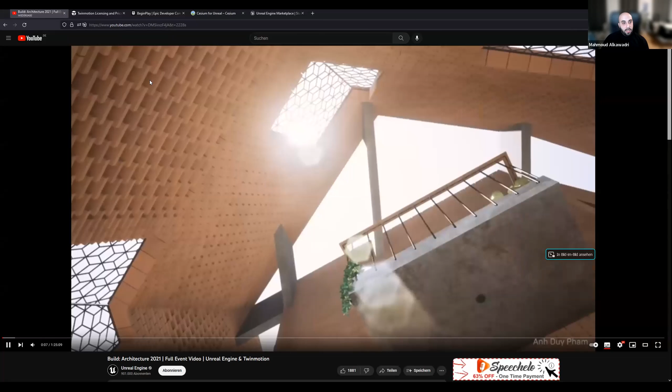I'm going to show a small demo from a big event from Unreal Engine called Build Architecture. This is just a 2-minute demo. I'm going to make it optimized for video clip—should be done now.

As you can see, Unreal Engine, or real-time, is much more than just images and videos. It can be more for applications, interactive apps, more shareable collaboration apps between different parties.

Unreal and Epic Games provide 3 main tools related to ArchViz. The first and most popular tool, according to the CG Architect survey last year, was Unreal Engine. Then comes Twinmotion, and now with the collaboration with Capturing Reality—or as the software is named, Reality Capture—you have the best invention in terms of photogrammetry.

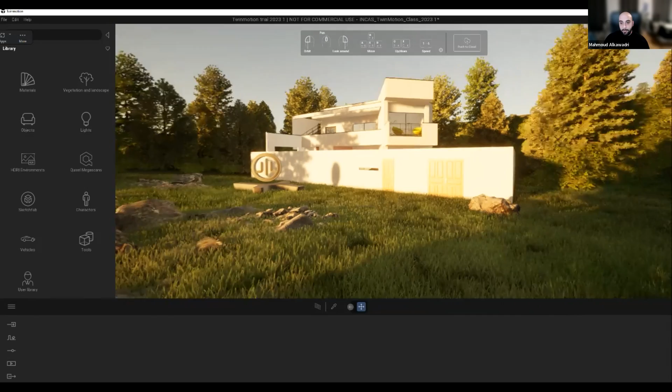Twinmotion - I will show you how it works by itself. This is a scene we will compose. What you need to do, in simpler and more accurate terms, is implement your own models. This is done through direct link or through the Datasmith exporter plugin.

You can import many objects inside of it. Once your object is ready, once it's already prepared inside your DCC software or inside your BIM or CAD software, all you need to do is beautify and compose your own scene.

The beauty of Twinmotion is that it provides you with a large library of pre-made materials and elements. This doesn't exist inside Unreal Engine.

You need to go through the marketplace and prepare them, or prepare them as a template that you're going to use each time. So here you have a large panel of your own objects.

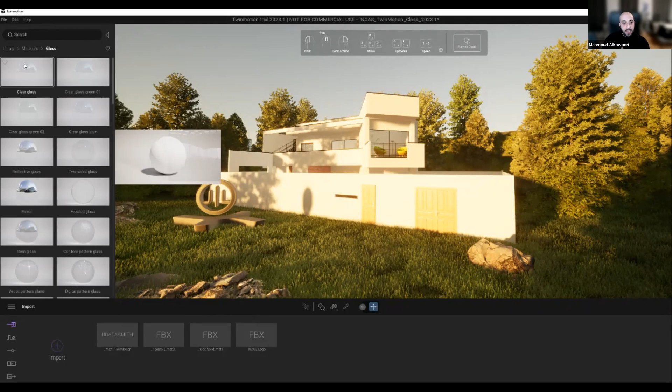You can see here you have pre-made materials, and all the materials have been categorized according to building family types, I would say, from glass and metal to stone.

You'll have multiple objects, and those objects are all high quality objects made to be used inside Twinmotion, and also made to work once you export them into Unreal Engine.

This is the interior library. So you don't need to go through the hassle of going through the marketplace.

Besides the materials, besides the pre-made objects, you also have the possibility to use the Quixel Megascan libraries. The same Quixel Megascan that you see inside Unreal Engine through the bridge is already implemented inside your Twinmotion.

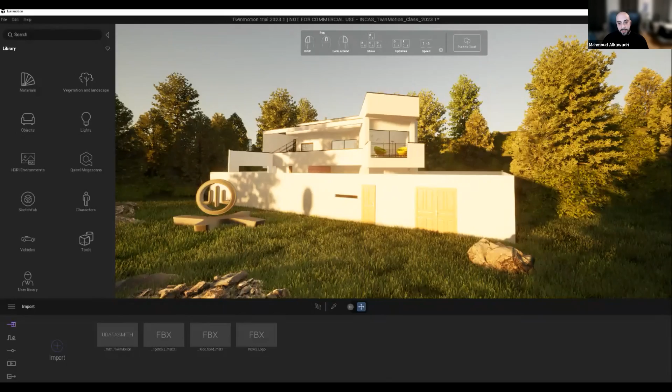The way it basically works with these libraries is, once you have your own scene, all you need to do is choose your element, and from there drag and drop it.

Drag and drop happens in two ways. It happens through whole families, because when you import your own scene from BIM software, it categorizes items according to family types.

Family types mean walls, floors, ceilings, glasses, everything. Or you can go through them and implement them object by object.

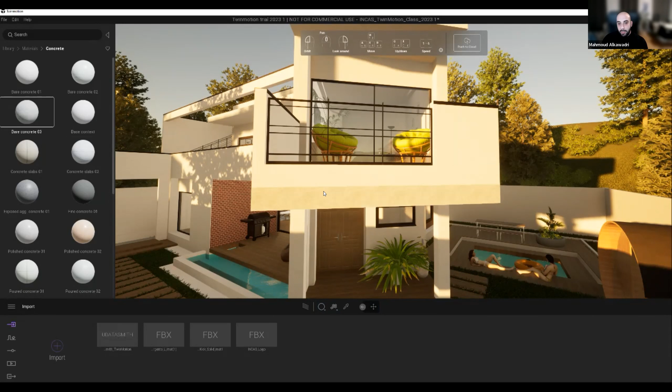And from here, you can decide how you want to do it - do I want to replace the material, or apply it just for an individual object? Once you decide, just drag it and drop it, that's it. The second part of implementing any kind of element is the same process.

You need to find your own object, find what's fit for you. I'll choose, like a chair, just drag and drop. This is an easy way to populate and dress your own scene.

The reason why people are using Twinmotion is not just for flexibility, but for rapid decision making. If I'm working as a designer and want an accurate or fast decision of whether my design will fit my need, Twinmotion is an easier way to do it. It's drag and drop, and contains large libraries of elements.

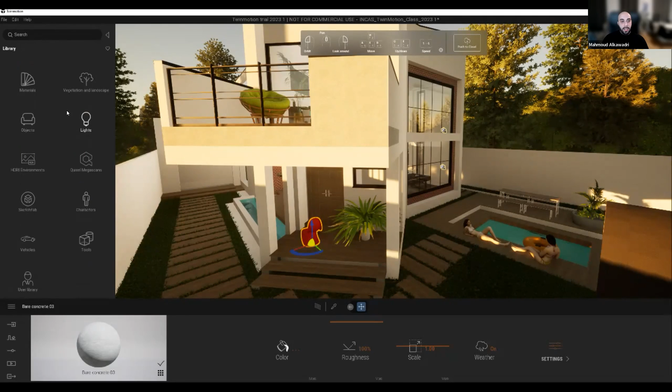Now the second part people are mostly interested in is lighting. Twinmotion provides 3 types of lighting, the similar way as in Unreal Engine: we have the dynamic sky lighting or the environment light mix. We have it here but in a smaller way.

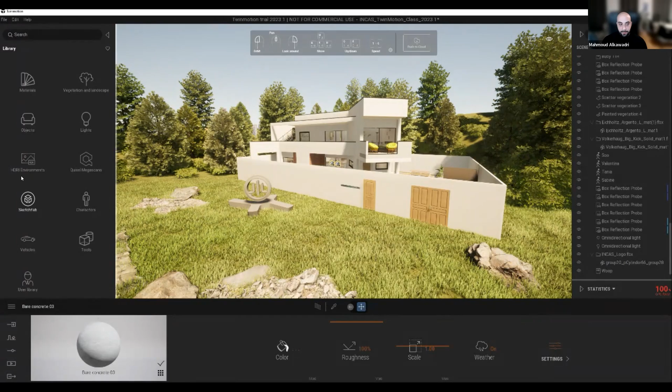They already implemented these inside Twinmotion. What you need to do is switch your lighting system. Instead of using dynamic light, go for skylight HDRI, choose the HDRI that fits your needs, download it and drag and drop it, and it will update accordingly.

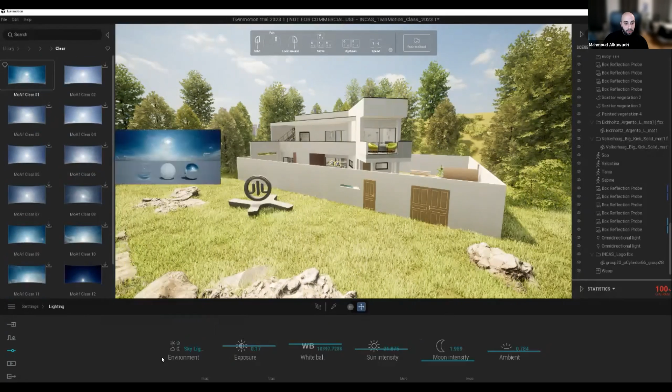Just go here, go to more, you'll see your drag and drops, drag it and drop it.

Now lots of people have been questioning whether the quality of Twinmotion is less than the quality of Unreal Engine, which is correct. In terms of reflections and shadowing, you can see there is a difference between them.

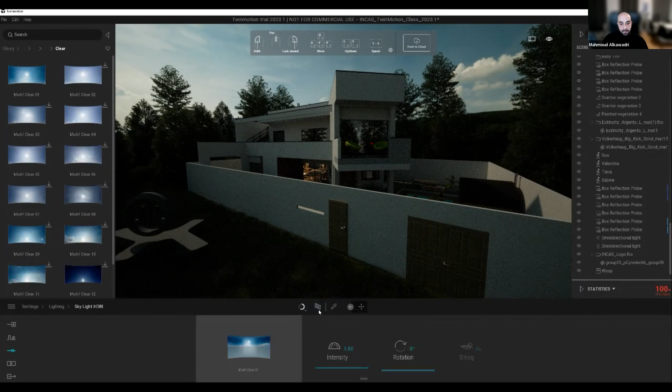But once you implement path tracing, just by clicking here, you will have a more accurate representation of what you have. Now I'm using an incorrect sky, but if I go back again to my dynamic light, you can see how it was like this. And now if I pause it, I will have a correct shadowing, a correct reflection, and a correct light and material representation.

Now in terms of timing, path tracing is relatively fast compared to Corona GPU or V-Ray GPU or any kind of offline rendering. So it's not a downside of using path tracing.

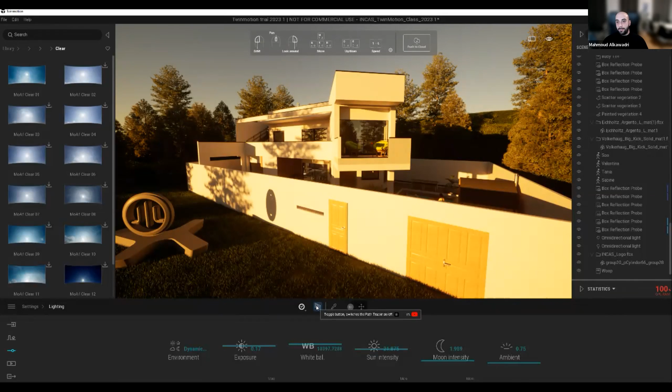As I said, there are two types of ArchViz normally: ArchViz pictures used mostly for commercial use or for selling your own product, those need to be high quality, accurate representation. And ArchViz used to take a decision inside the design process, this doesn't need high quality or accurate fidelity.

Now, beside these libraries, you'll also have the library of Sketchfab. Sketchfab is a website that provides mostly photogrammetry objects or objects made by people. You can take them, implement a complete scene, and then implement it inside of your own scene.

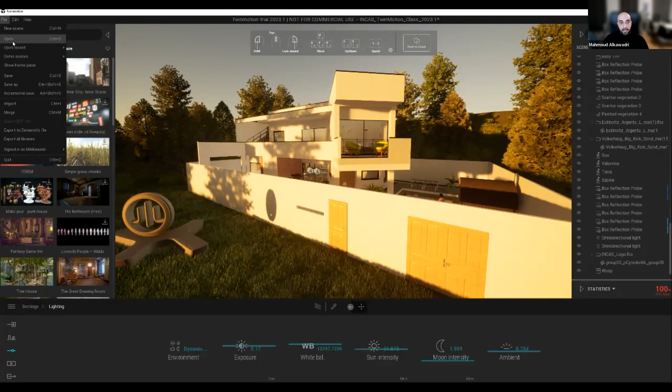Things that make Twinmotion more applicable for people, or more in need, is that Twinmotion also has the capability of using geospatial information, not the same way Cesium does, but if you want your own context for your own project, you can go here, say urban, and search for your place. So if I go here and say Berlin, where I am now, okay.

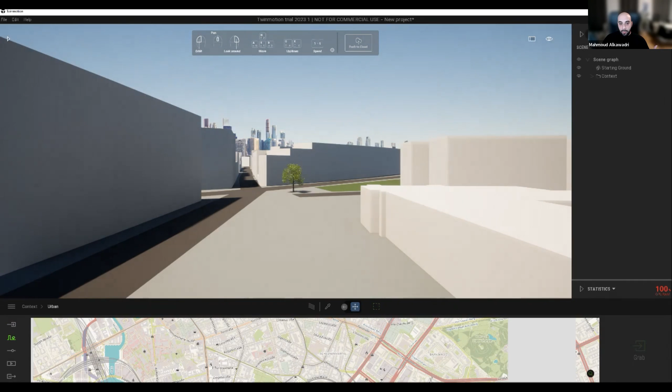I can have a border where I want, for example, if I say this is my land, I can have a border as my own context, and then say grab it, and it will give me a model with relatively accurate height, but it's not going to be the same way as Cesium. Cesium will provide you with more texture, more material, or more accurate representation of your own context.

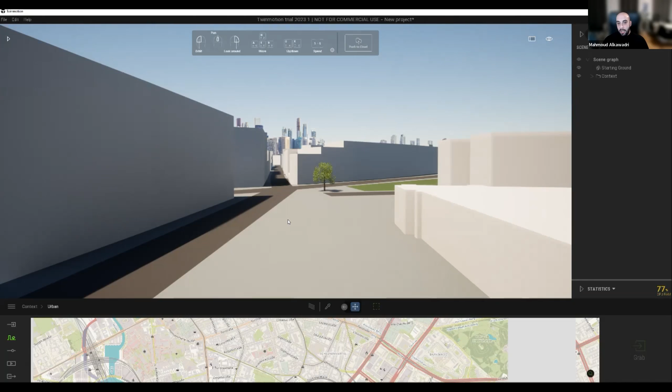The second part of why Twinmotion has been implemented is it provides a way to simulate crowd, simulate vehicle movement, and simulate people. So if I go here and go to path, and decide, for example with a design of a bridge or of cities, I want to see the workflow or movement of people or vehicles.

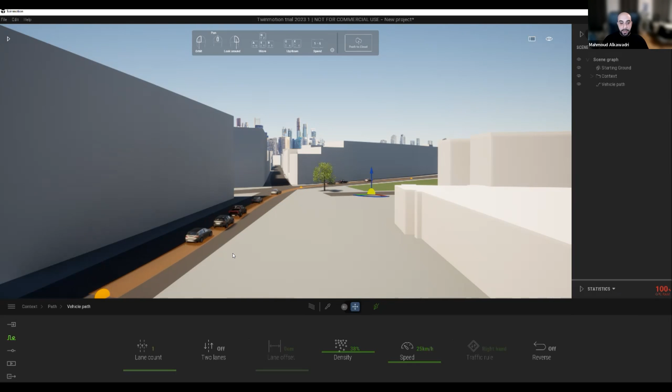All I need to do is draw a path, representing my own places here, and it will automatically generate cars for me. Once needed, it's already going to be taking movement, and you can control the width of it, the density, the direction, and everything. You can also have pedestrian types, go from pathings here, I'd say I have characters, let's say here people are walking, so you can have a representation of how the movement is going to be done.

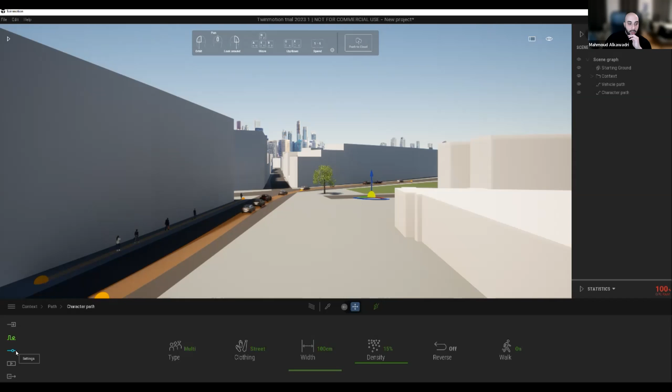This has been more powerful inside of Twinmotion. The last part is I am capable of having a different type of presentation. I can have images, panoramas, videos. I can have phases. Phases means if I am doing renovation for an old building, I can have the phase of the state of my building, the phase of what's going to be broken, and the phase of what's going to be newly implemented, and you can show it inside of phasing. You're going to have it as a presentation, upload your presentation to the cloud through Epic Cloud, and show it to your own client.

The workflow from Twinmotion to Unreal Engine nowadays is easy with the Datasmith bridge. You can export to Datasmith, and then you need to install Datasmith for Twinmotion from your own marketplace. Once you install it, you will have these plugins, and it will automatically bring everything related to your own scene, from actors, from materials, from the lighting situation, even from the backplate.

So if you want to take your own models and you want to make an interactive application with them, with blueprint elements, interactive elements, you can do it easily. This is where you can set up your whole composition, set up your own models, and bring it back inside of your Unreal Engine.

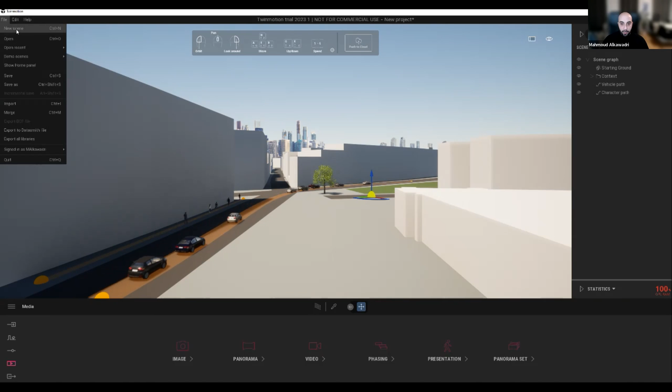Now, also the new Twinmotion that came two months ago provides, for people who are working in product design and furniture design, a set of pre-made virtual lighting studios for your own products. All you need to do is bring in your product and apply your own materials; the whole set with the lighting and the gobo effects is already ready to be used. Okay, just loading it.

Is there any question while loading? There is one question from the audience, from Marcel. He asks about a good water system in Twinmotion, but you can't show it, of course, if Twinmotion is still loading something else. So okay, maybe we can skip this for later.

This is the water system. It's basically a shader, a water shader here. It's just a material, and the material has a noise movement inside of it. Okay, but it doesn't simulate water. As far as I know, it doesn't simulate water in terms of particles, in terms of foam, in terms of objects colliding with the water. Okay, so no water interaction actually. No. Just a plane with the water.

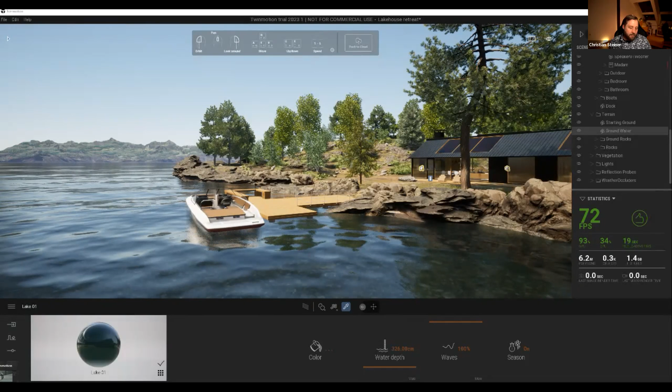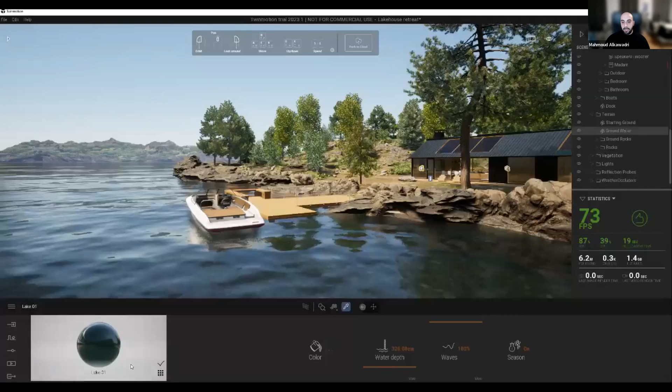I'm not sure, so I don't give you a false indication. As far as I know, most of the geospatial data that you have is basically just a screen capture of satellite here. You don't have an accurate representation as in Cesium or any other city engine, for example. This is as far as I know. I'm not sure if there are any kind of plugins. I know that Logan here has some tutorials related to geospatial on YouTube, as far as I know.

Okay. That looks like it. Yeah, it's only possible with additional plugins to georeference any entities exactly in a scene. Okay, thank you. Anyway, I'm not sure. I've never used it before, so I don't want to give you a false answer.

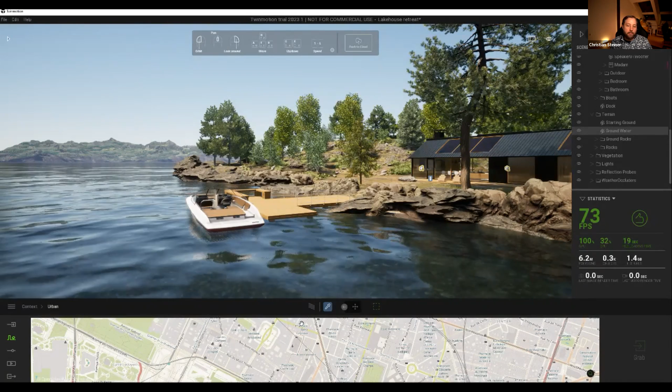We can also save this for later. Logan, you already wrote in the chat that you will put the link here in the chat. So at the end of the presentation, if there is still some time, maybe you just come up and show it to us if this fits in the time frame. But for now, I think that's a good point to go on with the presentation. Okay, perfect. Sure. Thank you, Christian.

Okay, how is the pipeline normally inside of Unreal Engine? It's the same pipeline as for any kind of ArchViz. You import your model or you build your model. Rarely you build your model inside of Unreal Engine, but mostly you import it; you prepare the models from your DCC software or from your BIM software. And then once it's ready, from Datasmith or as an FBX file, you need to set up your mood, your atmosphere, just natural light. As we said, we are aiming for photorealism, not a cinematic look. It depends on your purpose.

Once I do it, I go through the process of beautifying my scene: creating all the necessary materials for all my objects, creating the artificial lighting, dressing my scene with elementary objects, and then I will work on my world building. And yes, AEC is part of world building. World building is a large terminology. It's mostly for gaming, for film, for ArchViz, because at the end of the day, you are doing cities or neighborhoods, which is basically environment design.

And once I have my buildings, they can be set up in a city, on a cliff, or near the sea. So you need to be aware of what tools Unreal Engine provides to implement your own world building. Once I do this, I will go for the cinematic look, preparing my cameras, preparing my sequences. If my output is going to be images and videos, this is the way to go.

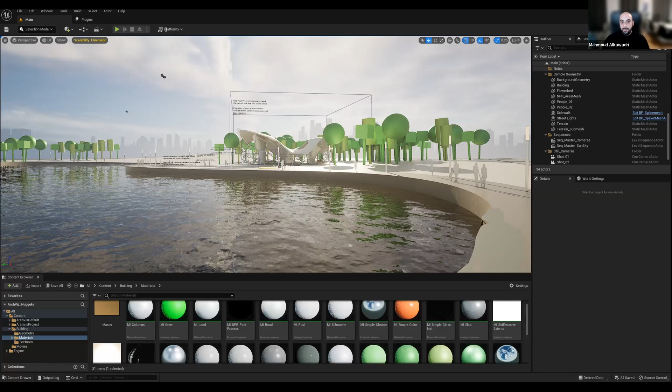Wait a moment. Now the DataSmith plugin came up. I don't know if there was a problem with the stream, but hopefully now it works.

We see everything. Okay. Now, once your Datasmith plugins are activated, normally they're activated if you are using the ArchViz template itself, you need to go here, go to Datasmith and select Direct Link import. Then you will find your own scene, select it, and it should be loaded. I will go here. Another connection now here. This is my connection.

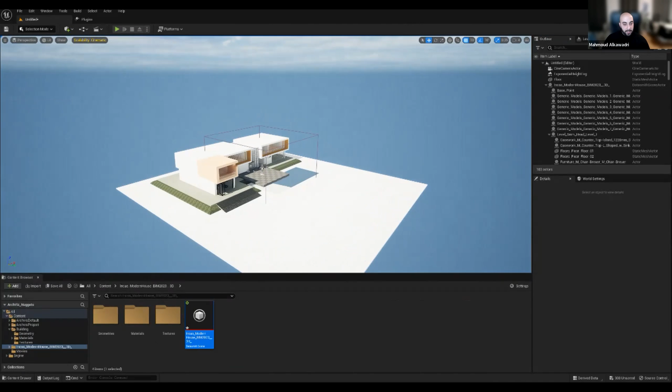In the meantime, while it's loading, can I ask you a question from the audience? Yes. So Winfried came up again and asked if it also supports IFC, Industry Foundation Classes. Yes. Import. Yes, it's supported. Yeah, there is IFC. Short, loud, and clear, Winfried. Yes.

That's awesome. Yeah, in all versions, 3, 4, and so on. I'm not sure. Okay, but in general, it's supported. I know it's supported. Okay, that's great to know.

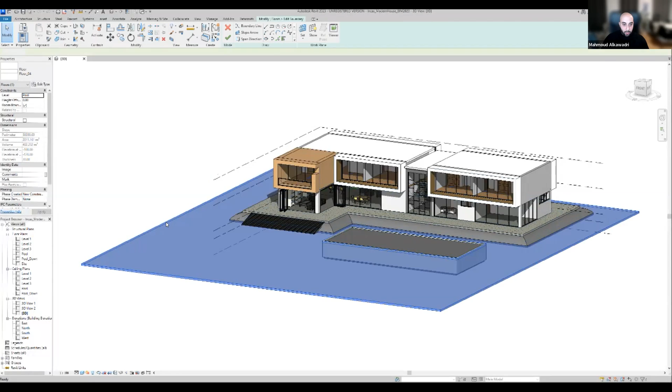Okay, this is the direct linkage between them and any editing inside of your software. For example, I'm editing my own model, change it. Let's make it smaller. And then I just save it, don't attach it, save it. It's going to be directly adjusted inside of my Unreal Engine.

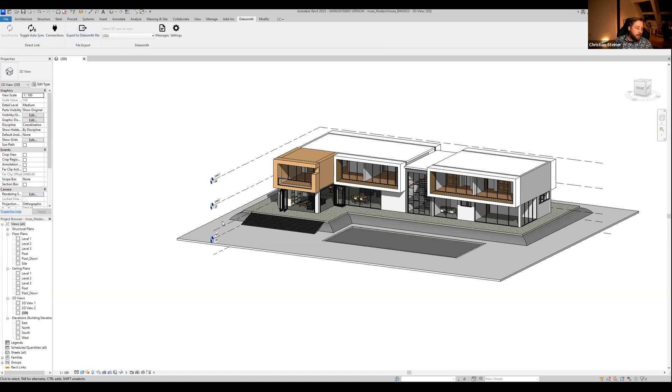Yeah, now do you see it? Yes, we see everything. It's maybe just because you share only the application. I don't know. No, because I'm opening 8 applications at the same time. Got it. But we see everything. So I'm just going to make it easier. I'm going to close all my Twinmotion. Okay. So to make it easier for people to not have cut streaming.

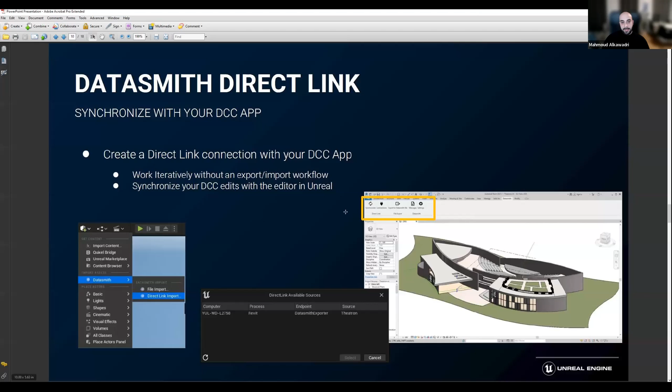Okay. So this is the way you can implement your own workflow. So now, when I have my DCC, normally the pipeline is easy. You will have it through your DCC or through your CAD software, and through the Datasmith importer it is going to be implemented inside of your content browser, preserving all the hierarchy inside of your outliner. And the hierarchy will be taken according to what software you are using. Okay. So this is the pipeline from Datasmith.

Import, translating your data. If my data came from NURBS system files, it might need to be tessellated, generating static meshes from it. The density of my mesh will need to be readjusted. If it's not, I go directly through my hierarchy. If there's a hidden element, it can be removed. If there is unstructured hierarchy, it can be flattened, it can be merged together.

Once I have my hierarchy and everything's ready, I need to check and improve my own models. If my models contain any flipped faces, flipped normals, any kind of material elements, bumps, holes that need to be closed, I can do them through modeling tools. Then I need to see, do I need to generate proxies, LODs, Nanite from them as optimized ways, and then go through the process of beautifying them: material, UV, all the variant generation.

Then we have these hierarchies. As I said, Datasmith creates a hierarchy of parent and child actors inside of your Unreal Engine. And this depends on your software. Some DCC software, some CAD applications will help with the process, minimizing unwanted structures. For example, in Max, you can do all your layering, grouping, converting your CAD elements as block elements, having a dummy attached to your own objects, and adjusting your own pivot point.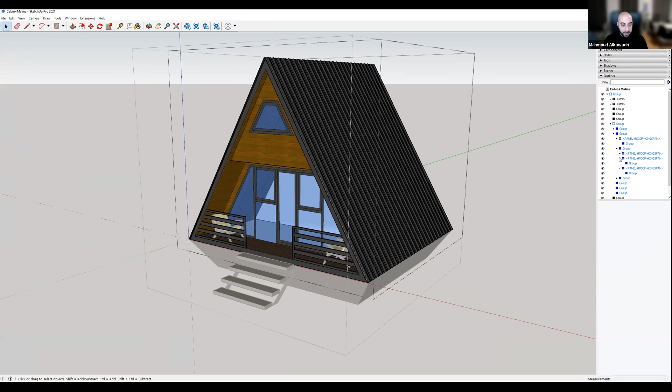So if I go now, I will go to file, new level here. What you need to do is right click and find from here Data Prep, Data Asset. I will name it DP, data preparation, and say cabin.

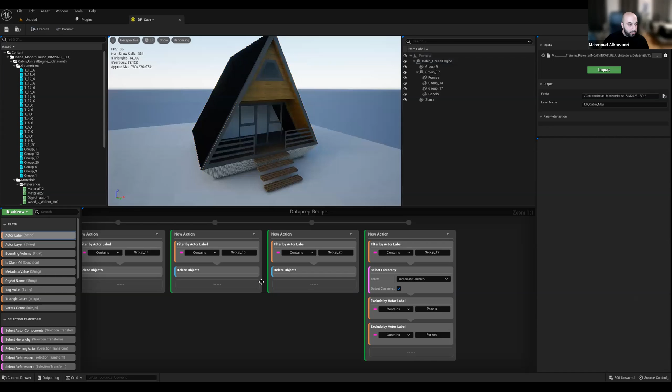Okay, now I have them. Now when I execute, okay, I'm getting rid of it. Oh no, I didn't do the merging - sorry, I need to merge it, I need to merge all of them. So merge, and I would say here cabin base.

Okay, and now when I merge it, this is my cabin completely. It contains my whole elements, and it contains them all now in one element with different material IDs.

Okay, I probably got the dumbest question ever, as a non-pro user here. For example, deleting these groups, group 14, 15, all this stuff - why do you have to do this over the recipe? Why can't you just click on this data system on the right of your asset and just click on, I don't know.

You can use it, but it contains lots of groups, lots of hierarchies - finding your own object is not going to be easy. You always have to understand, not just this element, but also the other elements in the scene. So first it looks like a lot of additional work to just delete a folder over the recipe, but in the end it's cleaner.

This is why you have two options: either I clean in DCC and prepare it well, or if you find an element for free inside 3D Warehouse or Turbo Squid and want to use it, there is always a way to clean it. And as I said, NURBS software like CAD software, like Rhinoceros, depends on a NURBS system - mostly you need to retessellate your own geometry because the geometry has a different mode, not polygon, not triangulated. It depends on curve vectors and having surface in between these curves, so it has a different way. Data preparation is always one way of implementing everything.

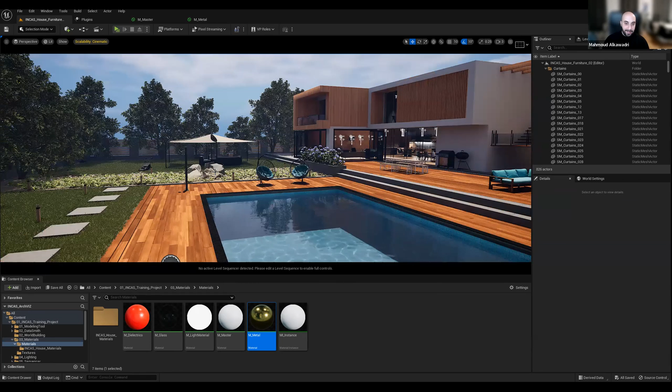World building in this scale here, what I have is basically related to the foliage tool. We know the foliage tool as we know it from our EMEA trainings. So when you go here, you can have your own foliage tool. Most of the elements I implemented from Quixel Megascan, convert them now to Nanite, they have been prepared for it, and then from Nanite I store them inside the foliage tool and start to populate my own vegetation.

In the case I need, or I have an environment related to, let's say, the sea or mountains, everything, I will do my own landscape here. I don't prefer to outsource it. This is different things - you can do it in software like World Machine or World Creator and then bring it in, but you need to be aware of the size of your height maps, or you can start sculpting and implementing inside your scene. This is the general process.

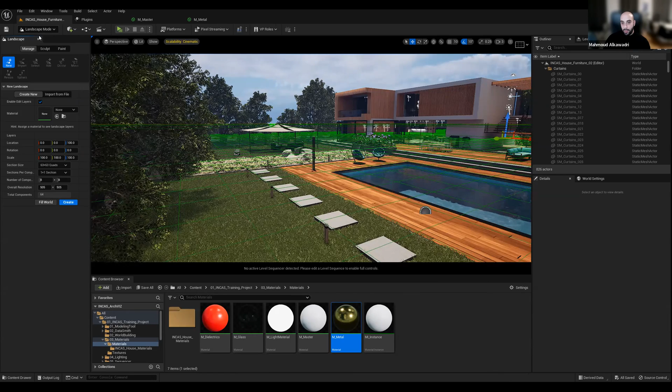Once everything is done, once everything is populated, it's all about going inside the sequencer and your cinematic. The thing I also prepared for our training is to make a small application in terms of level variants. What does that mean? So when I play it, when I simulate it, it will generate a small application. So if I want to see, or oftentimes the client demands you to see a different variant from materials, you can script it, program it.

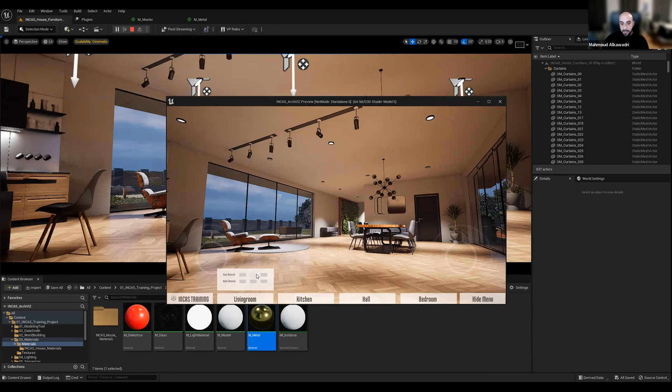So if I go now to INCAS, generate it. If I go to my living room, it's as simple UI as it is, you can now start to switch materials. No, this is a different scene... let me check, oh this is a different scene. One second, sorry, is there a question while I open the main scene? Let me check, there is a question from Marcel. This is the scene, hopefully, going here, living room.

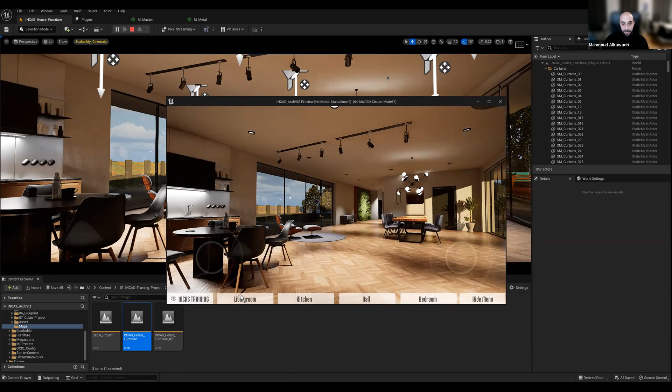So Marcel's question is related to the data prep part: is there a way to directly and automatically set the pivot of each mesh when it's imported, to automatically set the pivot point of each mesh.

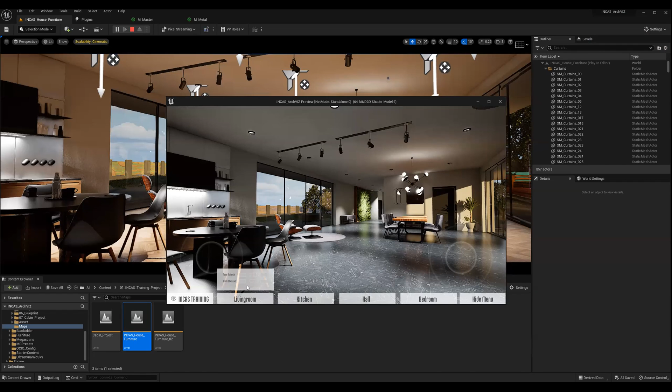I am, sorry, if maybe you said it's okay to interrupt you, that's why I interrupt you. Absolutely, yeah, okay, sometimes I just forget. I'm working with Blender mainly, sometimes when I export my scene I just forget to set the pivots of each mesh to the center before. So yeah, I could go back and generate and export a Datasmith file again, but I just wonder if it's possible to do that within the Datasmith pipeline.

I'm not sure, I'm gonna check it with you. I don't have an accurate answer, but let me check. Let me see where is my Datasmith, my cabin file here. Should be when I go to my cabin here, if there is any pivot point. I mean, you could make a custom operator, but I actually didn't find a way to set a pivot.

I mean, with the easiest blueprint way, you'd also like to adjust your pivot point through the modeling tool. I know it's just an extra step, but I'm just wondering. Sometimes you ask yourself a question. It's a correct question, but I'm not sure if you're able to do it.

I'm seeing now here, sorry, then just forget it, because I thought maybe you just got an answer for it, but I don't want to waste the time. You're showing really interesting stuff here. We're close to the finish, so it's fine. But as I said, I'm not aware, I don't have it. Maybe somebody at the chat has an answer, so I'm sorry for that. Okay, thank you anyway.

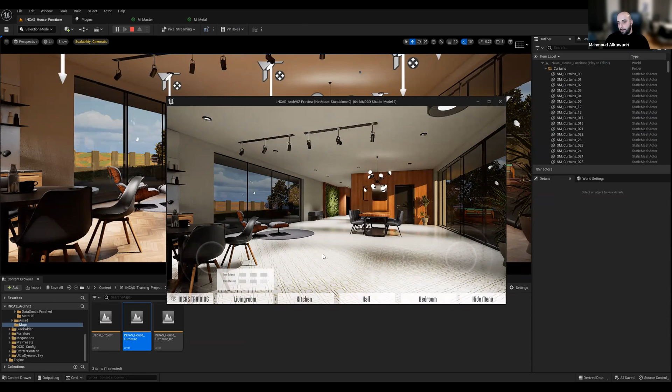Okay, and lastly is the output. Normally, as an output, if I am using sequencers, I will have a standard way of render settings. I will show it to you. So let's go here.

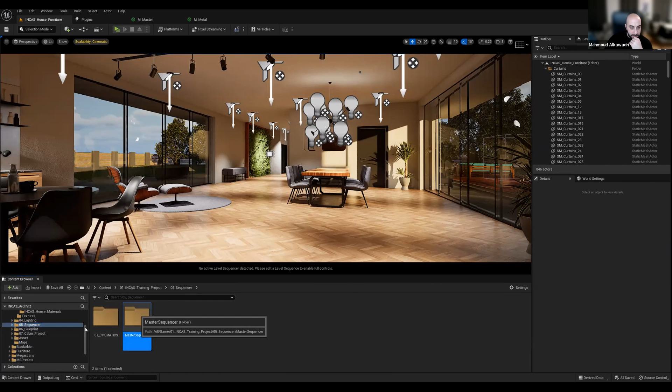CLO, okay, let me open my sequencer. Should be here, master sequencer. This is our sequencer. Remove this. Okay, then if I go now to my sequencer, I go to my movie render queue after I set up all my camera and movie, and I put my configuration.

I have some sort of pre-made settings that I always use. Okay, and these settings have been, to be honest, provided by my mentor in Unreal Engine. It's perfect, it's easy to use.

I can just implement an EXR sequence or a PNG sequence. And if it contains any kind of audio, I will implement an audio or wave audio with it. Then I will do my types of renderings.

Okay, and most things you need to be aware of is your anti-aliasing. I will have one spatial sampling for overall sampling, and then for temporal sample count, I will do 24. Don't exceed it. In my experience, when I ever exceed it, some of the movement or some of the movable elements will end up frozen.

24 is a good start, but I also do warm-up frames for it. I start with warm-up frames for the rendering engine, like 128 frames. So if I'm switching from one scene to another scene, to avoid any kind of flickering, warm-up frames will allow me to set up the new scene to be ready and then rendered.

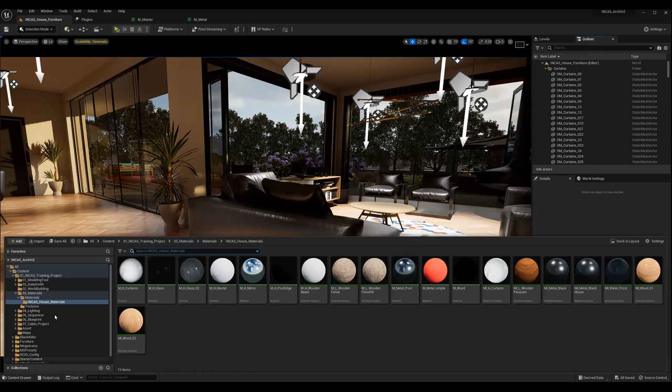Hey, how you doing? I'm just wondering if with your user interface, you're doing it set up through using the material parameter collections, or if you're using the variant manager for your variant switching. Yeah, exactly. I'm using here my variant managers, and I put here living rooms, and I put in here just a way to be able to switch my materials.

Okay. No, that's awesome. I've never actually used the variant manager with that. I've always hard coded it in with parameter collections. And so that's why I was curious when you said that. You always learn something new every day, right?

Exactly. Thanks so much for the presentation. Yeah, fantastic. You're welcome. I learned from you a lot also. I have to interrupt again. Anyway, same here. Really nice presentation.

But why do you hard code it, Logan? Because anyway, you could use arrays. Just put it on the right side and put in whatever material you want. Oh, that's what I meant with using the material parameter collection. It's basically the same setup as the variant manager, but in a different format, right? Instead of an array of 3 colors, I'm just changing albedo tint with a click of a button through changing the vector on the material parameter collection.

Right, like on a wall. That is what I'm also doing, and I always think I have to use the variant manager, but then I end up with the thing I always do. I maybe should have a look at the variant manager. Yeah, I think so. It depends on what you are going to aim for your output. Is it going to be an application, or just a show or video or visual presentation?

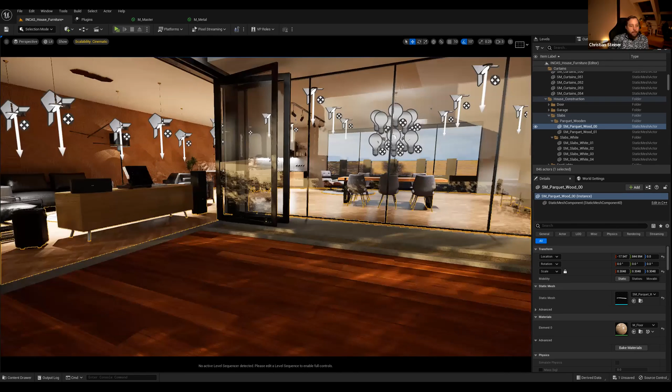Cool. More questions, Christian. There is one from Godwin. Hello, Godwin. Nice to see you here. He asked, can you show the variant manager example again? Yeah, this is here. Okay, now we have some lagging. Do it a little bit slower, the stream probably hangs. If your machine hangs, that's not good for you, but it's okay. Give me a second to minimize all those scenes I don't need anymore. I'm still impressed that your machine is running. Yeah, me too.

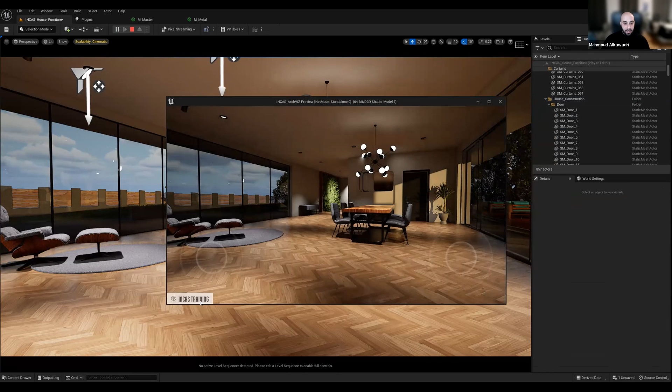Okay, just like I click it, I implemented the tabs as the main keys. Then I go for my categories, living rooms, and then I start switching according to my variant manager. This UI is so simple. I used my widget from widget blueprinting here, and it's basically a white square with a text above it, and each of them contains panels.

And from here, I started to do my own graph blueprinting, constructing bit by bit how everything should be done. Not complex. I'm not a blueprint artist, I'm not a programmer, but something at least to help me achieve what I want to do. Godwin, is this the thing you looked for? If he's still here.

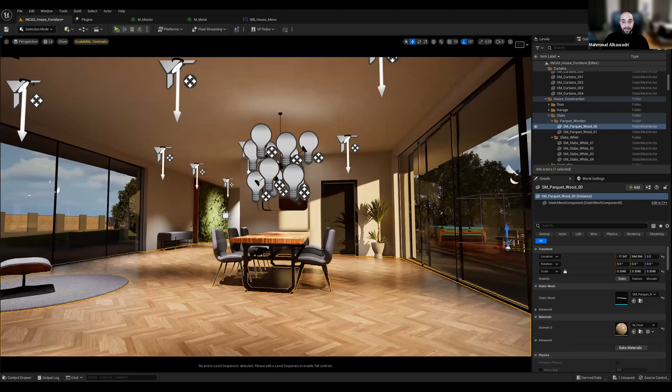Can you maybe also talk a bit about translucency and reflection of glass material? Okay, this is a different part. I know that in Unreal Engine 5 the glass has always been a pain. Unreal Engine 5.1 has fixed the Lumen reflection issue with glass. Still not perfectly accurate. If you want to aim for perfect accuracy, you go for path tracing.

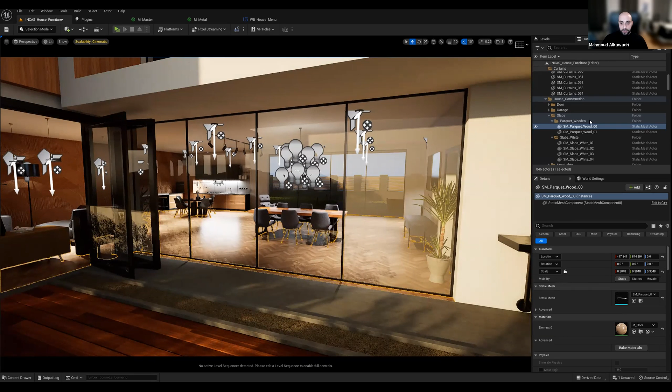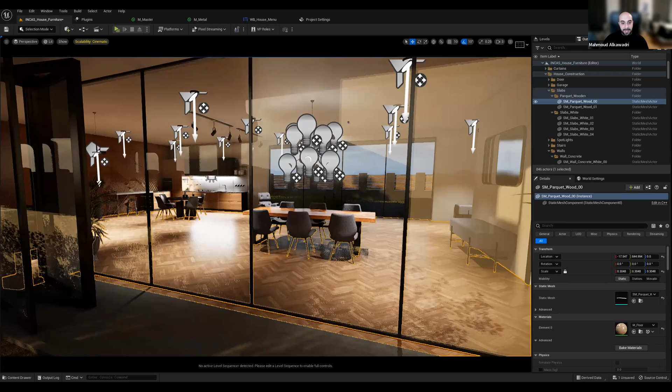What you also need to do, in your post-process volume settings, I normally go for ray tracing as reflection. You can set the reflection method to Lumen, but start to have it ray traced. Ray tracing is more accurate than Lumen in my opinion. You can do it from the post-process volume, and from here I set my reflection.

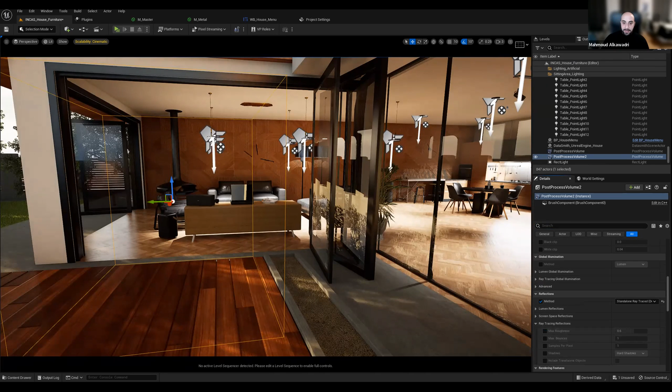So when I go to my global illumination, switch your reflection from Lumen to ray tracing. This was always the best way for me, and to be honest, it worked until now. So it depends on how you do it. If you have the capabilities, then use path tracing. Path tracing by default is going to be more accurate.

Hardware ray tracing, also I tried it. It's also quite good. Okay, but this is the general workflow from everything I know, from everything I learned from the artist community.

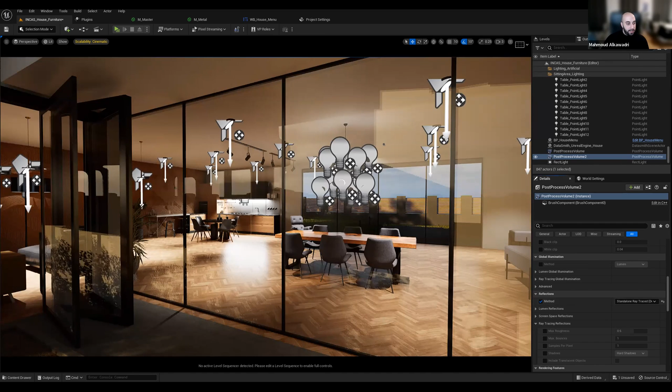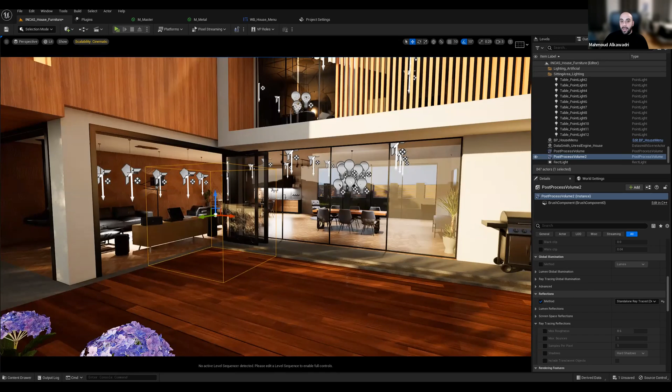I mean, this is a huge issue with the translucent material. I know for a fact, and I try to avoid it as much as I can. I know for a fact that I have my curtain here. From the inside, they look correct. From the outside, if I just move this, sometimes it's going to flicker. It depends on the way you also set up your own lighting. Okay, until now it's okay.

Talk about the point cloud created by a LiDAR and drone. Does Unreal or Datasmith play nice? I have no answer. I'm with Winfred. I haven't worked with a LiDAR scanner, to be honest. I'm an Android user. Reality Capture, I didn't use it, so I cannot confirm to you. Okay, thanks a lot. Just being curious. Might be, I don't know.

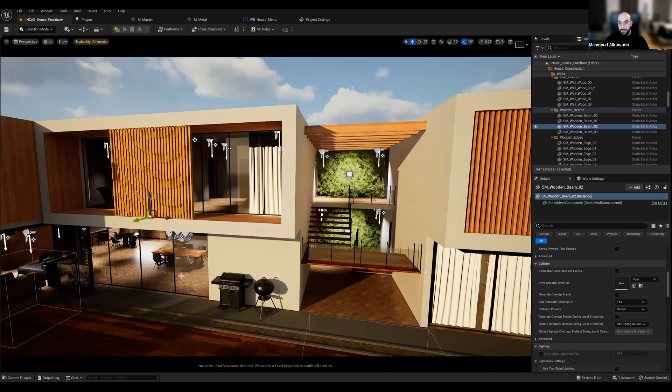Cool. Okay, thank you, Mahmoud. I'm gonna stop sharing it. That was fast, intense, but also really, really interesting. And I will just shortly take over the screen share.

So going from your glimpse, the keyhole from today, to the course. It's a 5-day course, right? So just for me as a beginner, what can I expect in these 5 days?